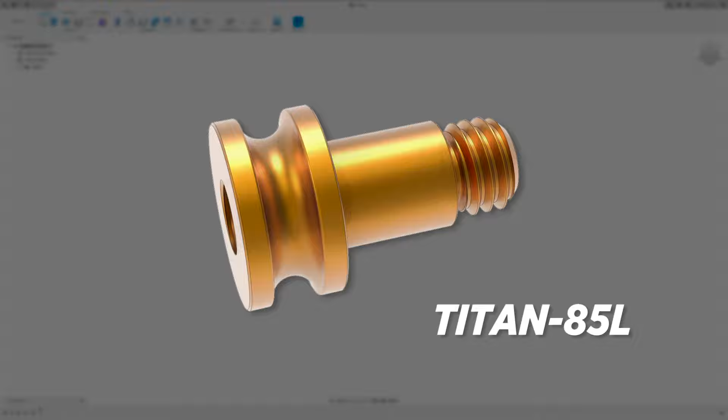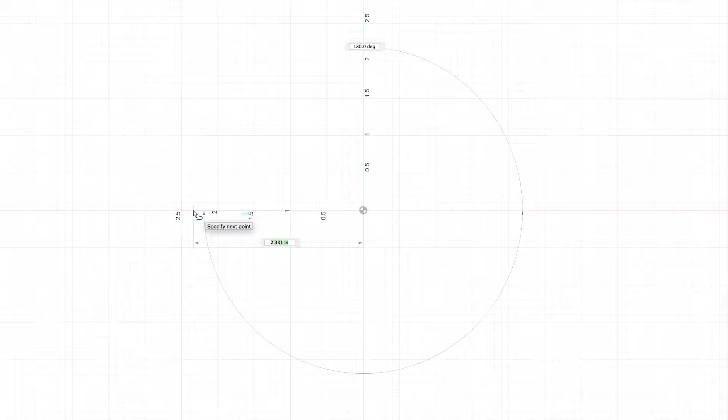Let's go ahead and get started. First thing we want to do is come up to design, make sure we are in design, and then we're going to create a sketch. We'll click that, and let's do all of this on the front plane. We'll select that, everything will rotate, press L on your keyboard for line, and we're just going to snap right here with one click, then drag it over here, type in 1.505, press enter, and what we just created is going to be our center line.

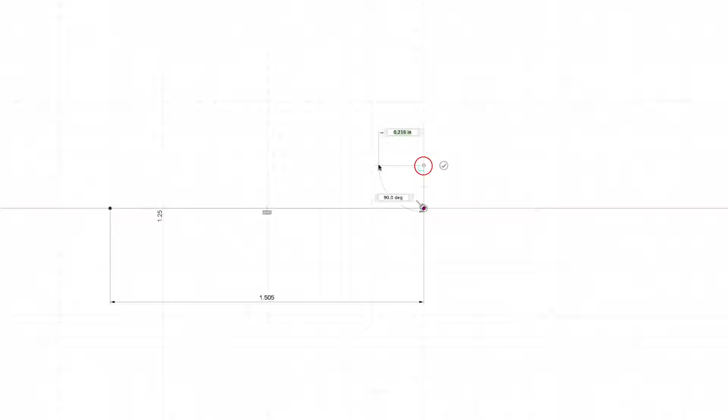We're going to go ahead and draw half of the profile, and then revolve it around this center line. So what I'm going to do is press L on the keyboard, and start right here, and just sketch out the shape. I'm not going to worry too much if my line goes crooked like these last two here. What I can do is come up to our constraints, click horizontal vertical, and that'll go ahead and straighten those out. Everything else looks really good.

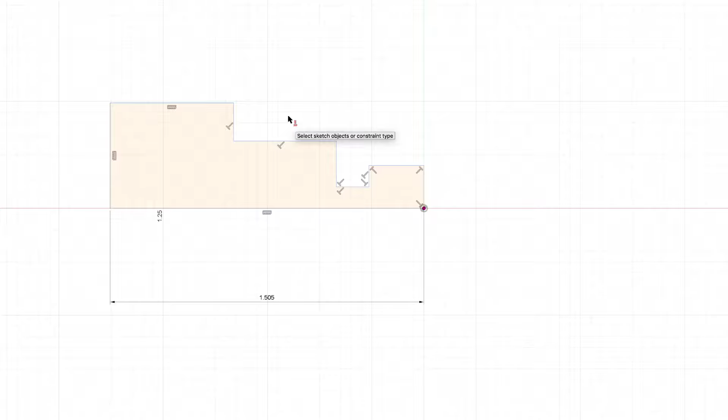If you're nervous or just don't trust it, go ahead and click it. If it cannot straighten it out, because it already is, you'll get a little warning down here. No big deal, keep on going.

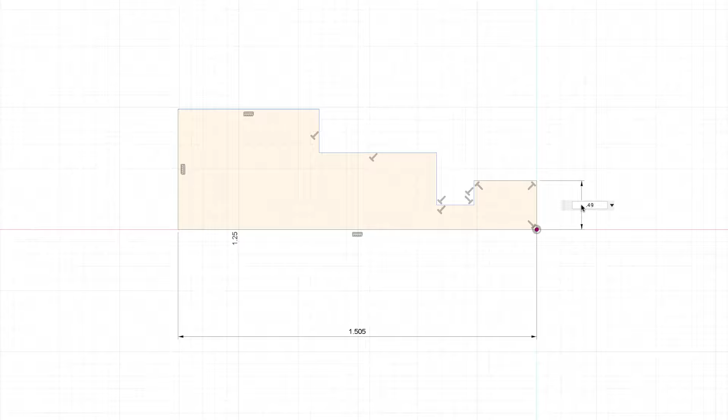So let's go ahead and add some dimensions. We're going to come up here to sketch dimension, or you can press D on your keyboard. I'm going to go from this center line to there, and we have a diameter of 0.49. We want to go ahead and say divided by 2 because we're only drawing half of it, and then enter. Go from here to here.

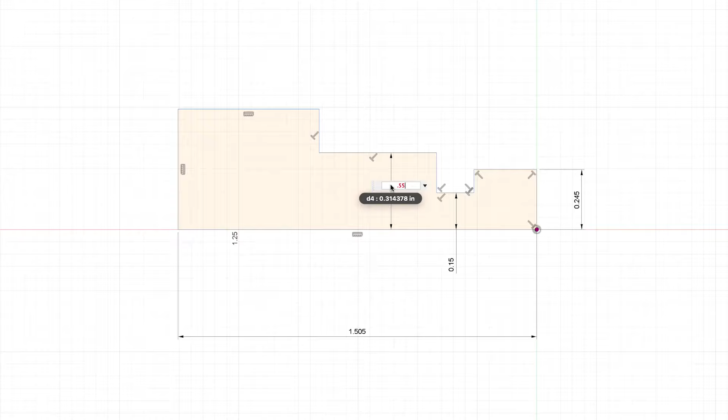That's a diameter of 0.3 divided by 2. Go from here to here, it's a dimension of 0.55 divided by 2. Go from here to here, we have a dimension of 0.475. Enter. Now we'll go from here to here, 0.5. From here to here, 1.14, enter. From there to here, it's a distance of 1.205.

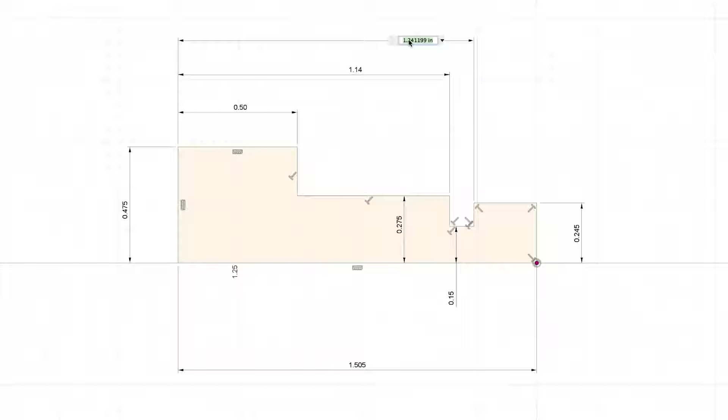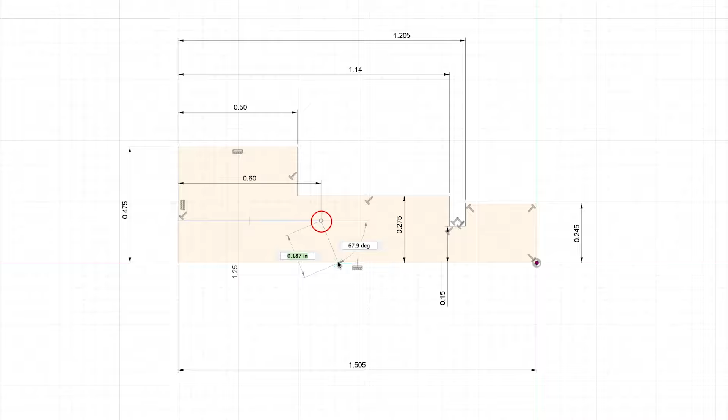Let's go ahead and sketch in our drill, or our hole that's going to be in here. So I'm going to press L for line, go over like that. We'll go ahead and go the maximum depth of 0.6. I'm going to press L for line, snap it here, click there. Go ahead and press D for dimension. We'll put the angle of 70 on this.

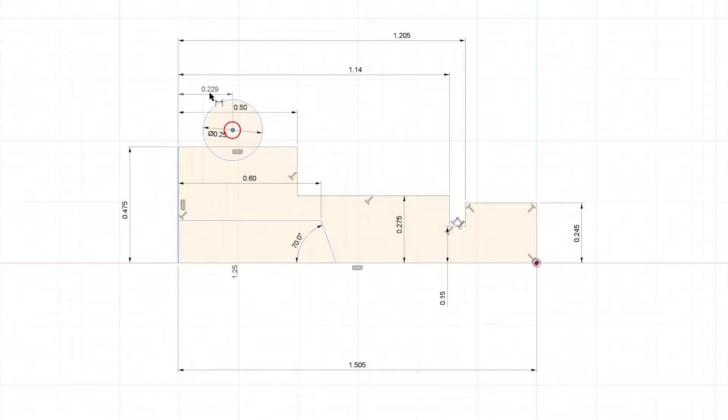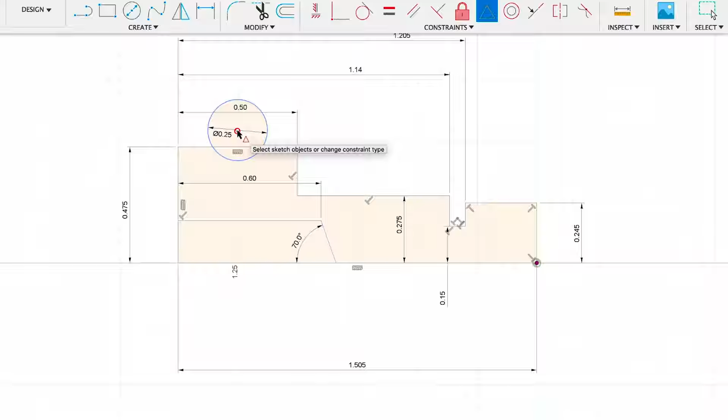Let's go up to circle, or just press C for circle. And just click, it's a 250.25, enter. And we can see that we have a dimension from here to here of 0.250. And then we can attach this circle to our line by doing a coincident. Another way we could have done it is not have that 250. We know that 1/2 inch and 250, that's half of it. So we can do a midpoint, go from there to that. There's a couple different ways to do it, and they all get the job done.

So let's go ahead and trim this out. We'll go trim, click that, and click that piece out.

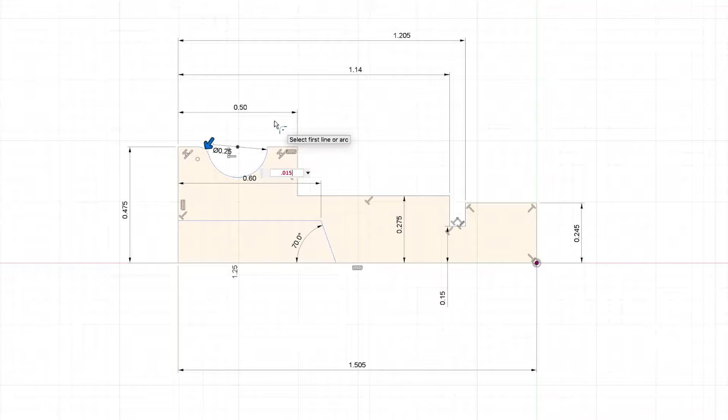Now let's go ahead and add some fillets. So we'll go up here to fillet. We're going to do one here, go 0.015. We'll do one there also, here, here, and here. Go ahead and press enter.

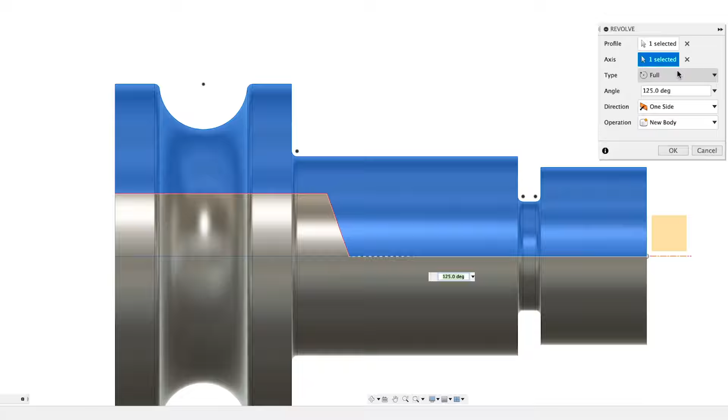Let's go ahead and revolve this now. So we'll go up to solid, revolve. I'm going to pick that right there, axis. I'm going to select our center line. It's going to be, type is going to be full, and we'll just say OK.

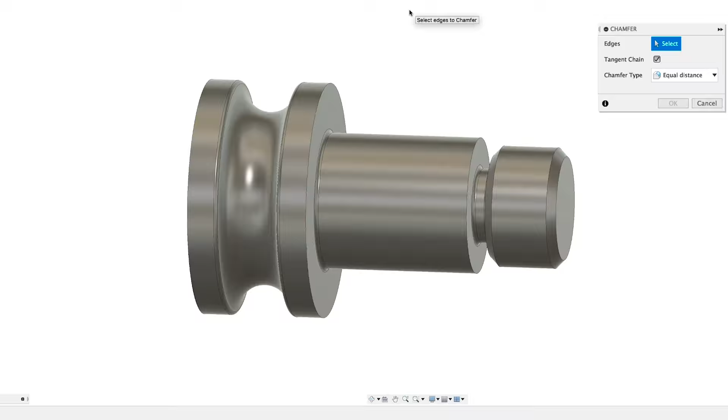Now we'll go ahead and go to modify chamfer. We got two big ones here, 0.035, enter. And if we want to go ahead and chamfer again, we can right click and repeat chamfer. Anytime you do something and you right click, you'll be able to repeat the last thing you did, so it'll constantly change. And those are just a 10 thou, 0.01. Enter. And there you go.

That is the Titan 85L.